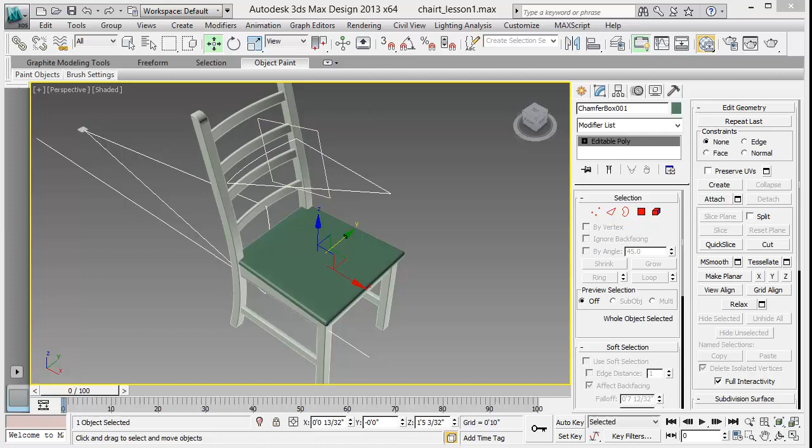Welcome to this tutorial. Here we will use the hinge from edge technique to create the curved back of this chair, and also I'm going to be using an arc and a horizontal line to do this curve back here. We will go from a curved leg to a straight leg, and we're going to also work on the back of the chair, which is another curved, using another arc. So you can see the chair has a couple of compound curves, and we'll get started.

So the first thing we should do is change your units to 1/32 of an inch in fractional inches. We will start by creating a tapered seat.

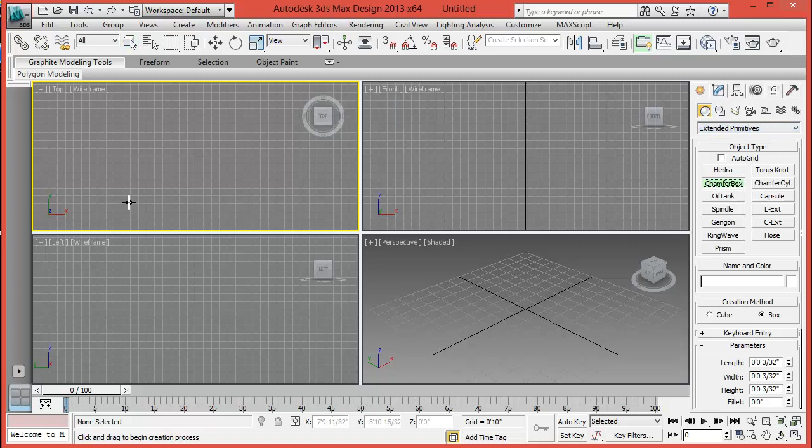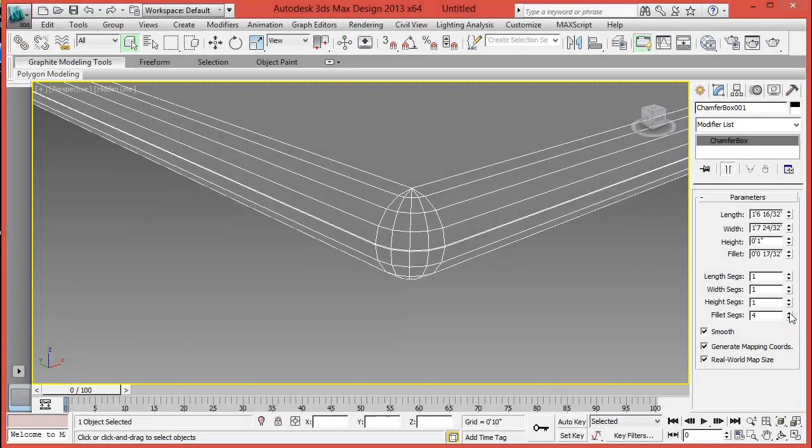From extended primitives, create a chamfered box. Make sure the dimensions are about 18.5 by 19.75 by 1 inch. We're going to change the fillet value to about 4 segments and 17/32 of an inch, and that looks pretty good.

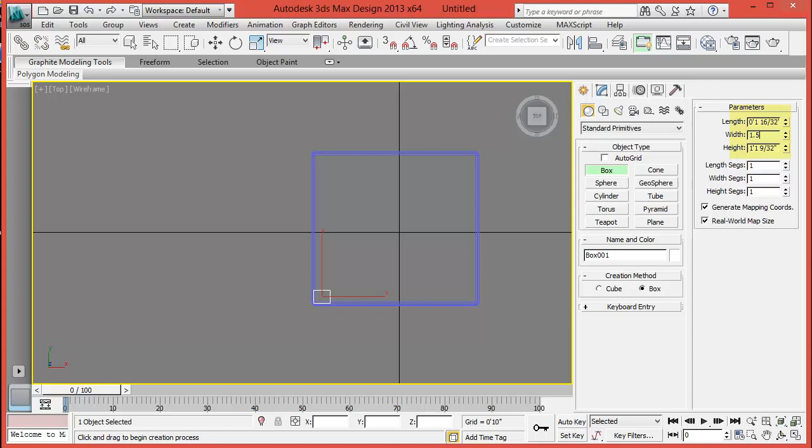Now create a box of 1.5 by 1.5 inches. The height doesn't matter right now, we'll work on that later. This is a guide to see where the legs are going to be cut. So we need to cut the seat around the leg.

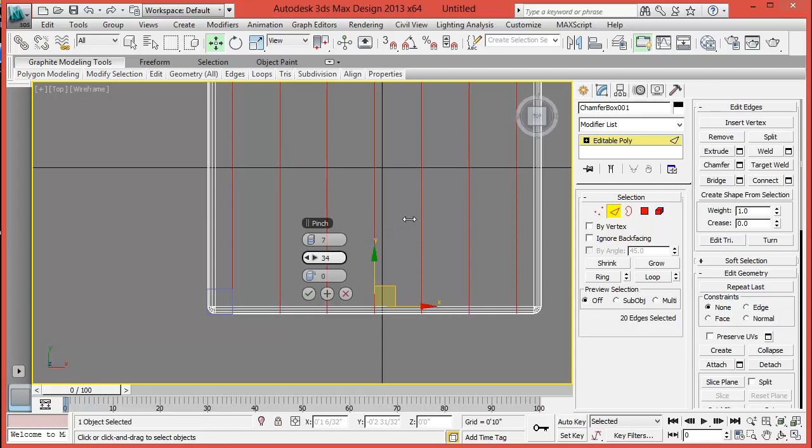So select the edges, connect a few segments, 7, 8 or so, and then slide the segments so that one of the lines is very close to the leg, like that.

Select the other side and do the same thing, and you should have a square here. Now let's move this box out of the way for a moment and select these corners and delete them.

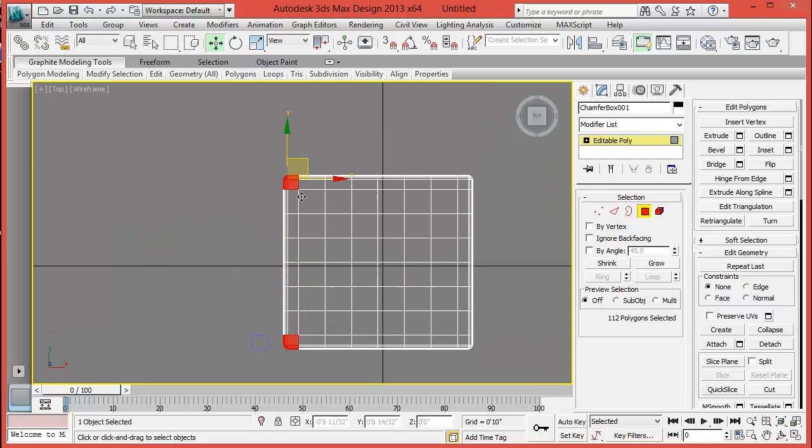Now we have created a hole in the back here, and we're going to close this by using bridge. Click on the edge, then select one of the edges and click on bridge, and go from one edge to the other across like this. Do the same thing here.

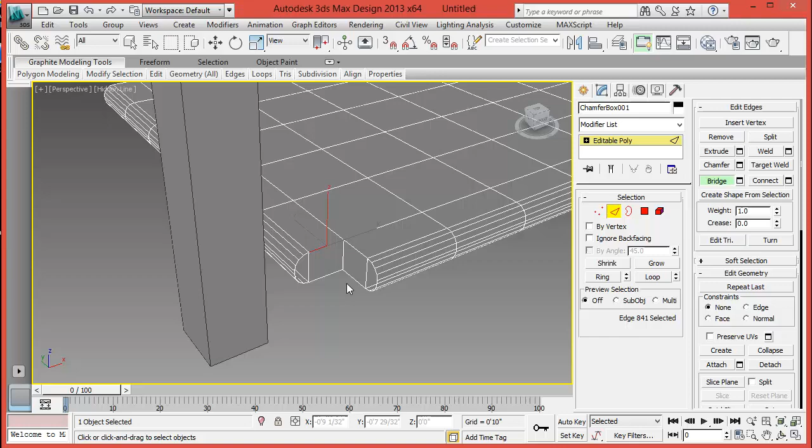We're going to do the other way, the other side, and bridge these two again. Now you still have holes to close, so we can use a modifier called cap holes while this is selected, of course. And that looks pretty good.

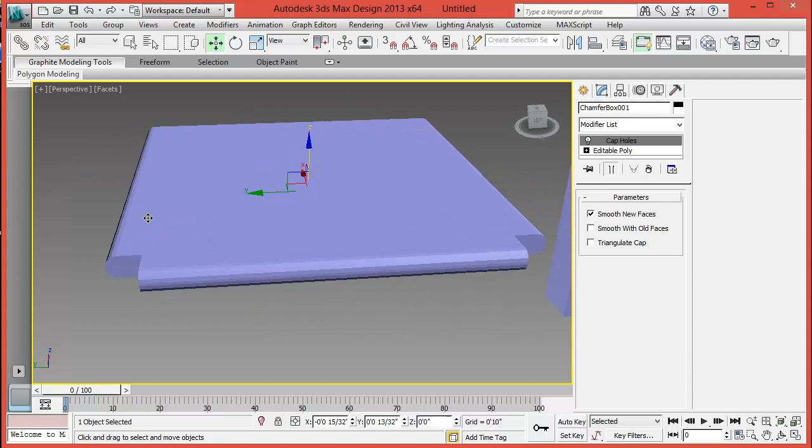Next thing we want to do is taper this seat so that it has the right shape. So we can collapse this first so it's one piece, and then we can change the shape by using the taper modifier.

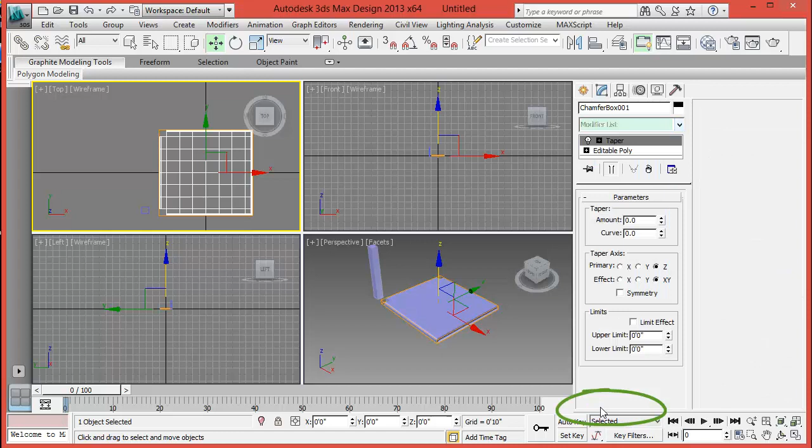Down here you click on taper, and then you can change the values here, maybe on the X on the primary, and then move it so that you can see the taper, and when you're happy you just stop there. Collapse this again so that it's one piece again.

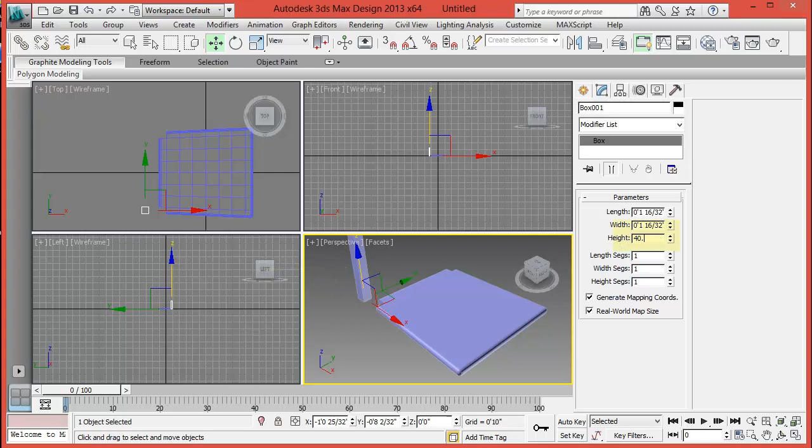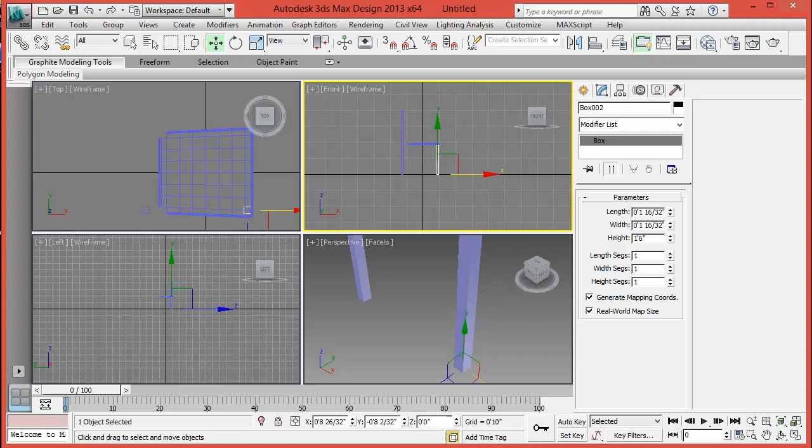Now we're going to raise the seat up to the height of 18 inches. So let me first make a copy of this leg, and we're going to make this about 18 inches high. This way we can use this as reference, and we can now place the seat exactly about 18 inches high.

And the next thing we're going to do is we're going to proceed to work with the back of the chair. So this is just for reference right now.

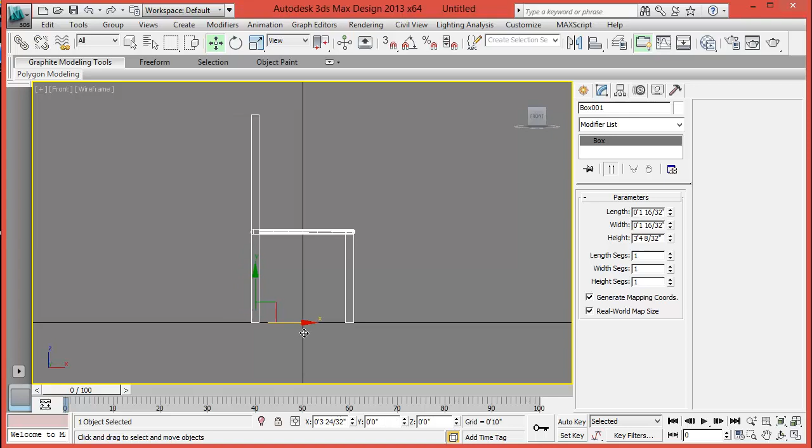Now before we go on, we are going to create a plane. Ignore this arc you see here for now, I'll explain that later.

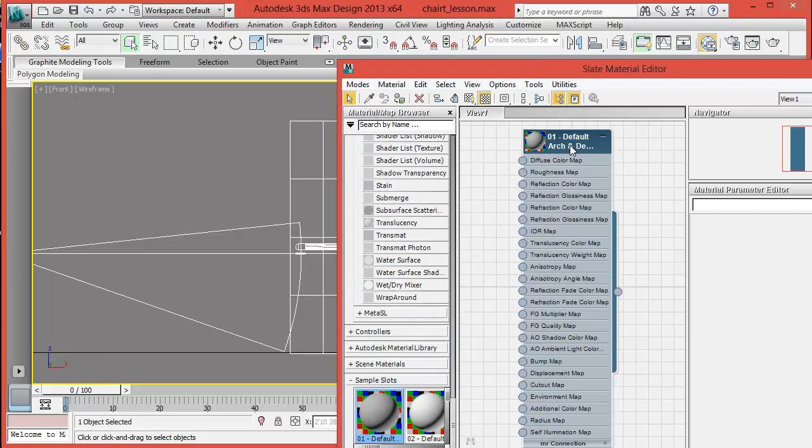On this plane I'm going to add a bitmap. It's a drawing I made from tracing from a photograph of a chair from IKEA. I have it here, and I apply this to the plane I made.

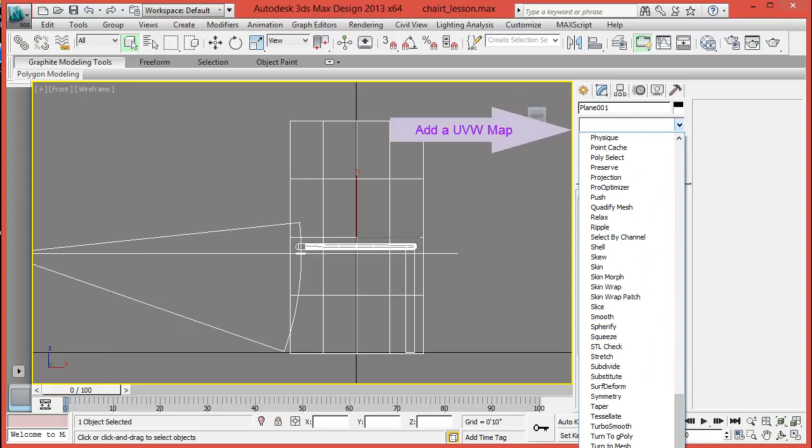Follow these instructions, this will help you see the image on our view here. Add a UVW map, make sure it's on planar, uncheck this here, and then change the views. As you change the views, we will be able to see the image here.

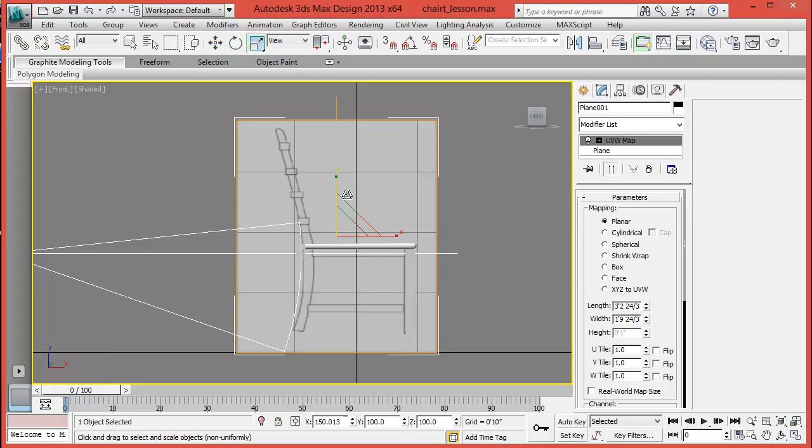Now you can size this plane so that it matches our seat, and the height of the chair. Once you get it done ready, we're going to proceed with drawing the arc we need.

I will delete this one for now and I'll explain. You need to draw a horizontal line like this for now and leave it here. It's just a line, we'll use this later and I'll explain why.

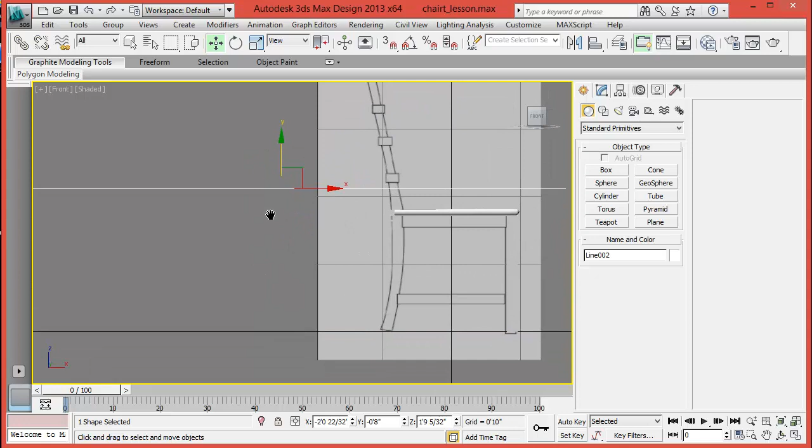Now let's proceed, starting with the leg with an arc. Click in the middle of the bottom of the leg and go up to about where you think the chair begins to go straight, and I think it's about here. Click again, pull the mouse and create your arc.

If you don't see the pie like you see here, click on this pie slice here. I'm going to change the color so we can see a little bit better. Now this horizontal line we're going to align with this, with the center of the arc. You can copy those values from one to the other one.

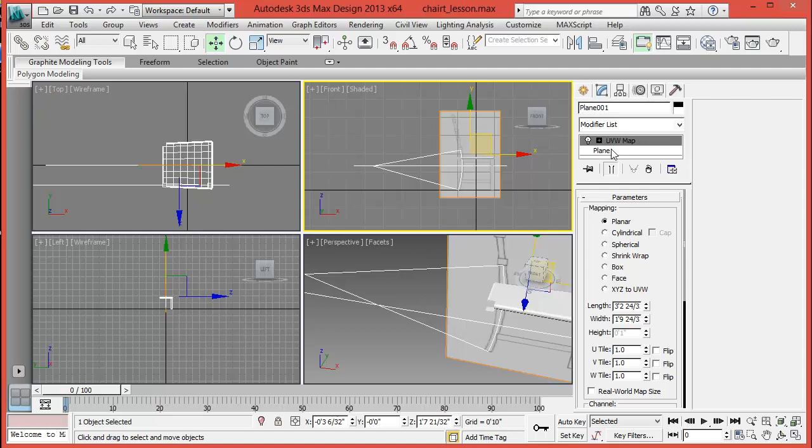We will also move a few things. Let's move the plane we made back here so it doesn't interfere with the drawing. And also we'll take the horizontal line and place it very close to the arc, so it's easier to see what we're doing here.

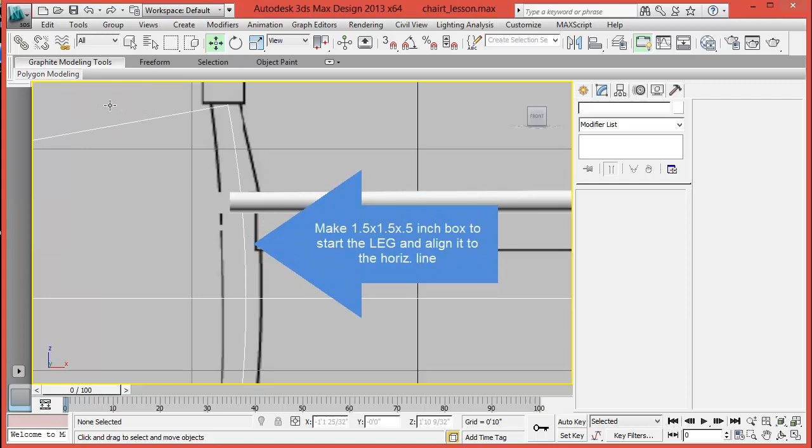Now we need to make a 1.5 by 1.5 by about half an inch or one inch high box. That's going to be the starting point, our leg, and we need to align this with the horizontal line and the arc. Where they intersect, that's where we need to place this.

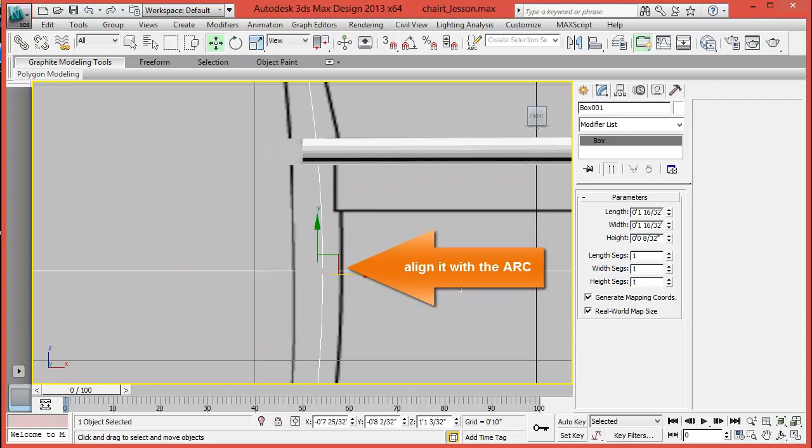You can't see it very well, so I'm going to change the color of this little box so you can see it. I'll make this a little taller so we can get started.

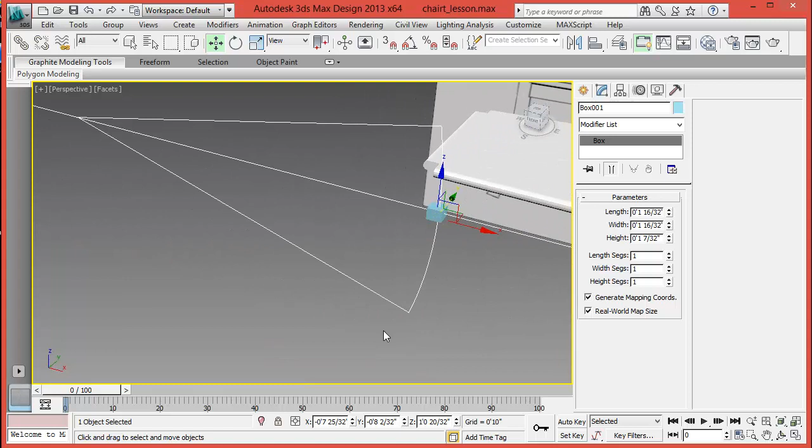Alright, the next thing we want to do is make it a little larger, center it, and on the perspective view, we're going to change this into an editable poly.

Select the top polygon and shift drag back. We're going to clone this as an element or to element, and align the edge of this polygon with the center of the arc.

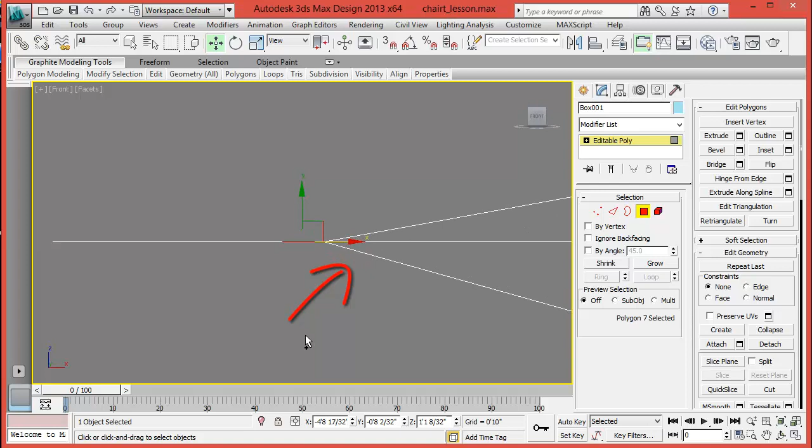So that's going to be our hinge. Now select this polygon here, click on hinge from edge, then click on pick hinge. We're going to pick the hinge, which is this edge here. Click on it, accept. But before you accept, we have to change something.

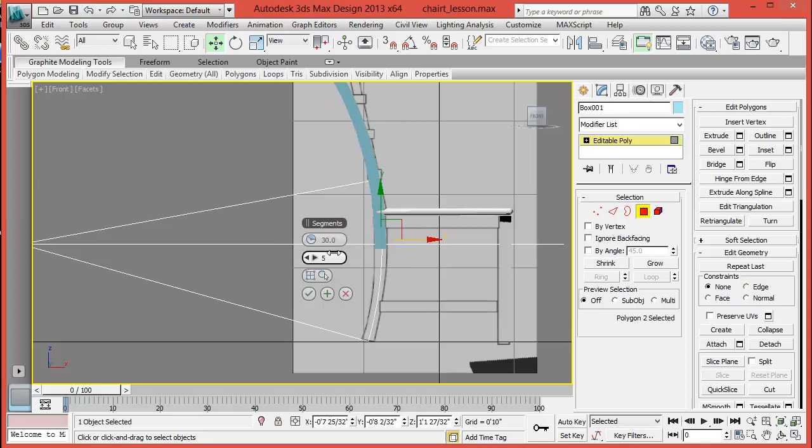The angle is 30. We go 5 segments, 6 segments, as many segments as you need. Let me change the view.

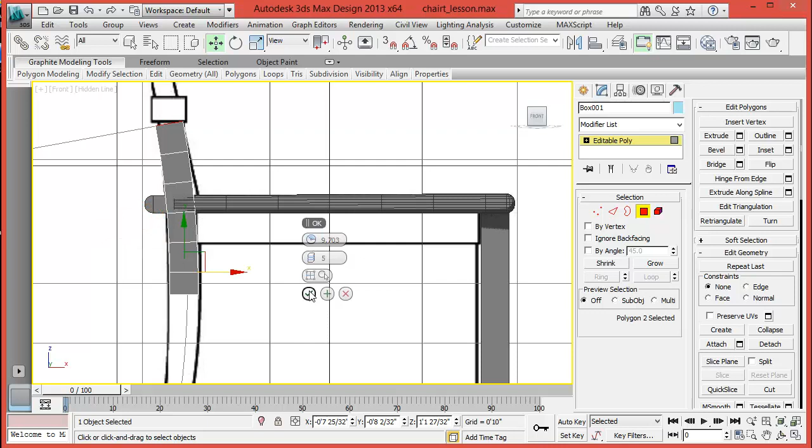Here's the angle. We need to go about that high, because that's where we're going to be starting on the top with our straight line. You add as many segments so that they align with the other pieces we're going to be working with. So say OK, and let's select the bottom polygon here.

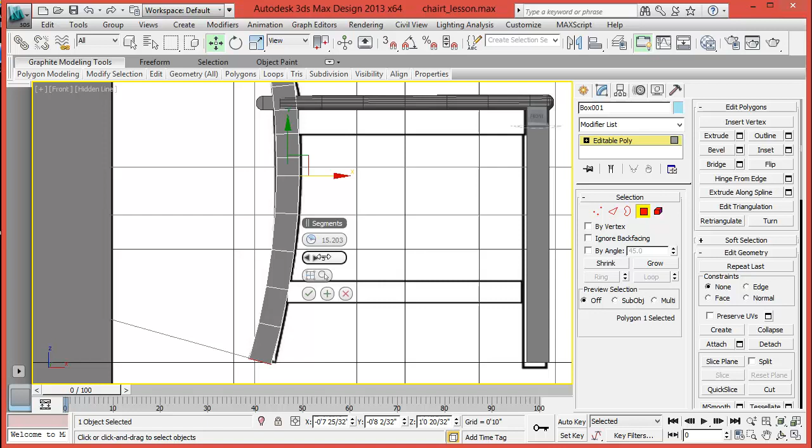Same thing, go hinge from edge. Since it's the same hinge, we don't need to pick it again. We just need to add the segments we need and the angle. Add as many segments as you need, so that these segments match the other elements here. We're going to be extruding these supports from here.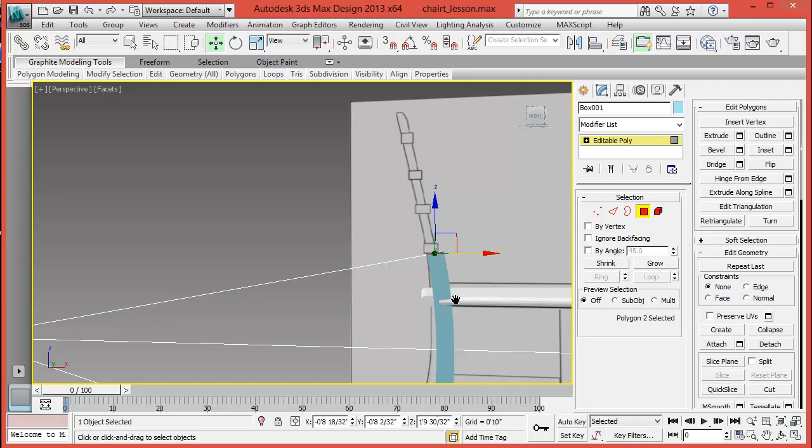Alright, next we select the polygon on top of this leg, and we don't need to hinge from it. We're going to simply extrude. Instead of extruding all the way to the top, let me change the view.

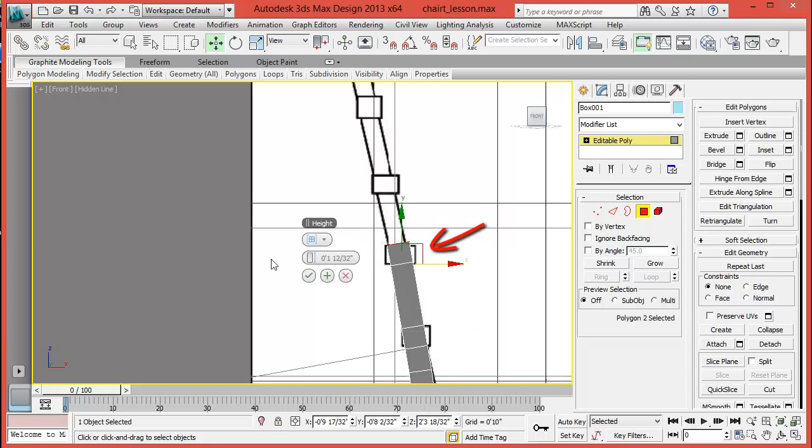We're going to extrude in segments. We're going to go slowly, and stop every time we need to create a segment. So this is the way to divide this where we need it.

So click on plus, add another segment, click on plus, add another segment, and once we get to the top here, we're going to extrude just a little bit more. We'll leave it here. Alright.

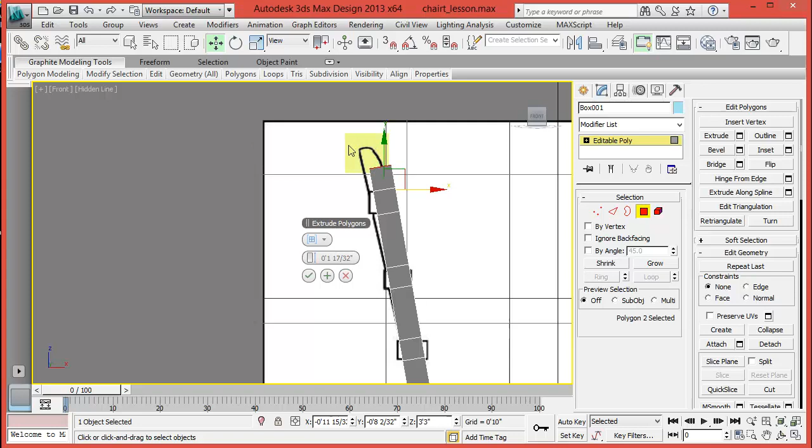So here we are with all the segments we need. We're going to work on the segments for the supports now.

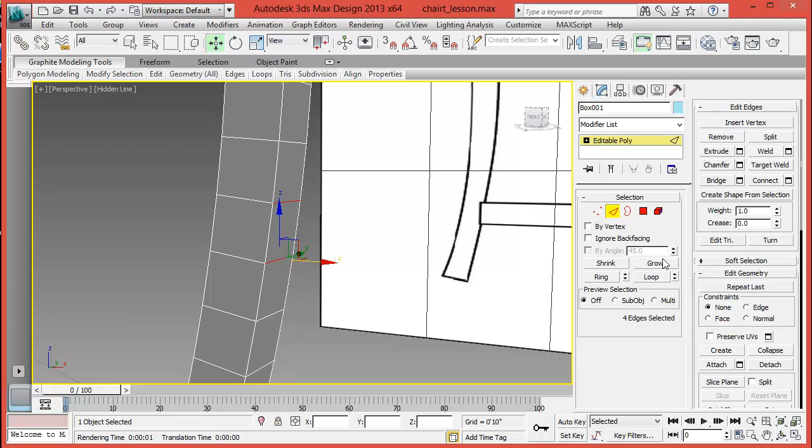Select these two, and then the one underneath here, where the support for the leg is. I'll just pick these two - I think I picked too high, but it's going to work. Connect, add two segments, spread them or pinch them so they're the size you need. Say OK, and then select the vertices of these polygons we just made.

And we're going to chamfer these also, maybe 1/16 of an inch.

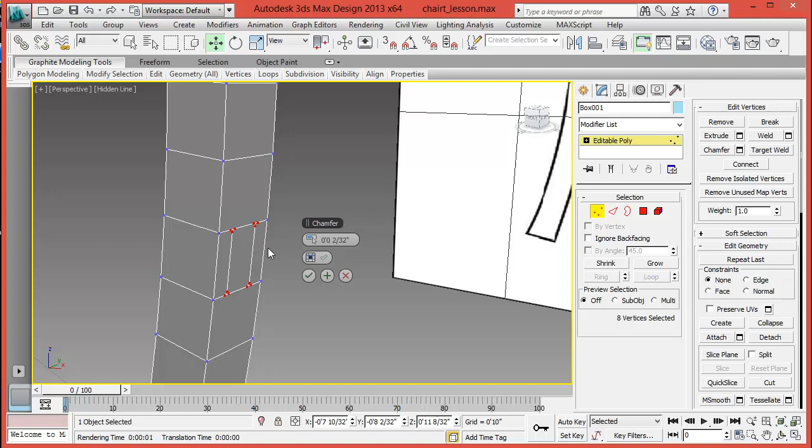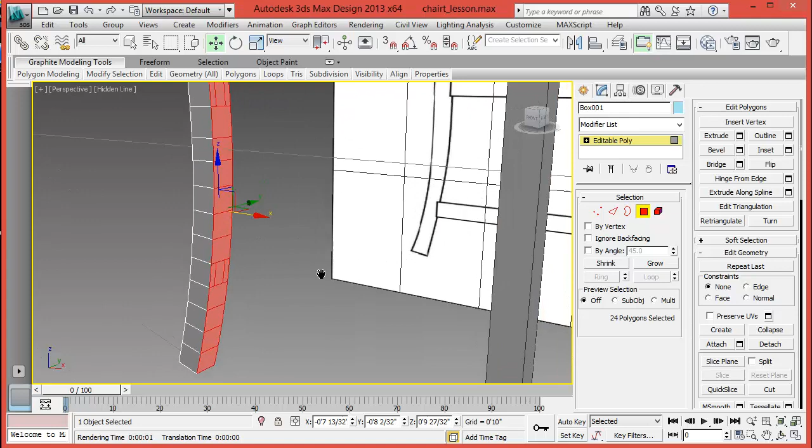Okay, now here comes the interesting thing about this. We're going to create the front leg from all these faces. We select all these polygons here, select all the polygons on this side, just below the seat.

Then shift and pull on X, so you copy and clone to element. And now from here we just go and click on make planar on X, and there you have it.

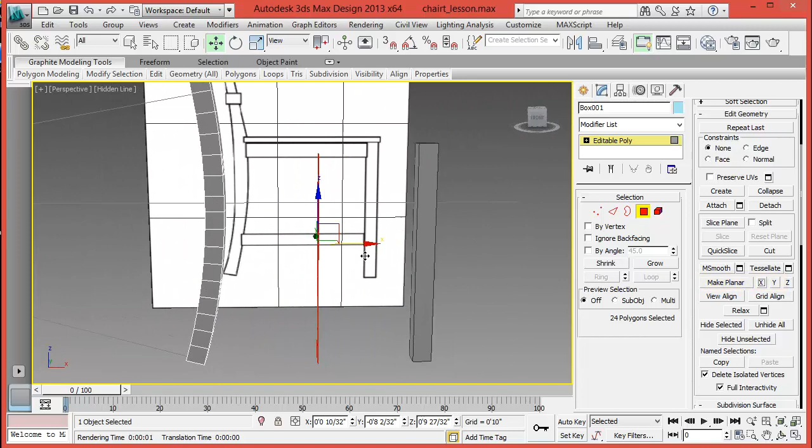Next thing we can do here is extrude this. Let me move it over here, and we're going to extrude about 1.5 inches.

What we're going to do is select all these elements, and we're going to detach this from the other leg. You can give it a name if you want. Detach this, say OK. So now it's a different element, as you can see here.

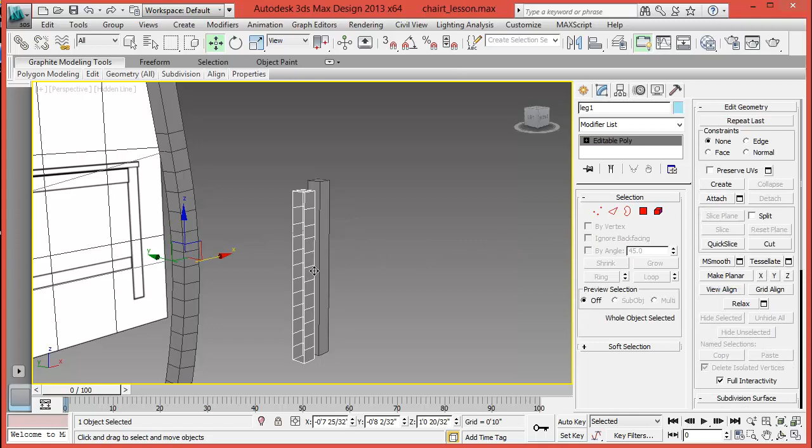I'm going to change the pivots or those center lines, the pivot references this way. Send it to the object so it's easier. So now we're going to move this a little bit over here.

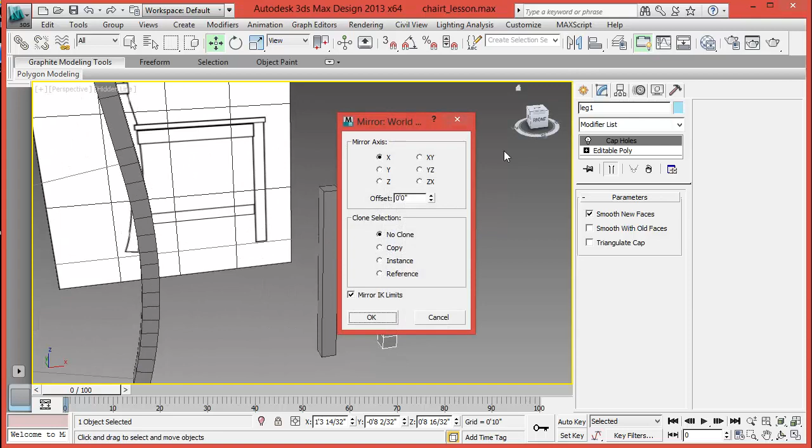And we will need to add this cap holes here, so we close the openings. Mirror it so it flips the other way.

Alright, now we can delete the old leg we made and use the new leg in place. Let me unhide the seat.

Alright, so now we have to remove this one - we don't need it anymore. And this one that has all the segments in place, we're going to put it back here. Delete this one.

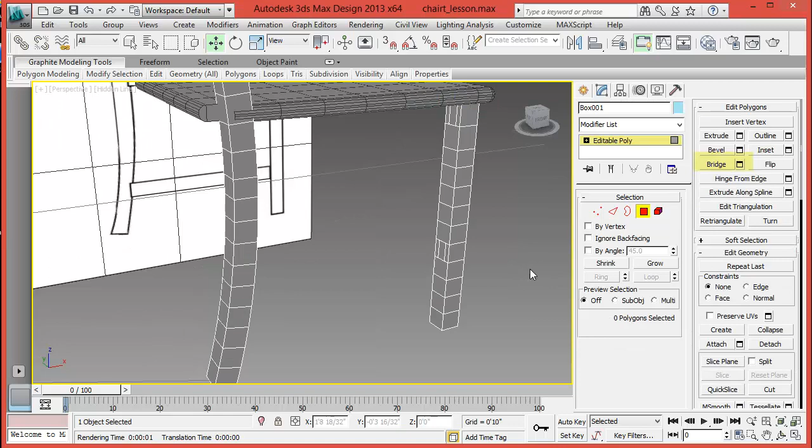Let's attach these two first. Now that they're one piece, bridge these here and this support here. That's great, it's horizontal, it works fine.

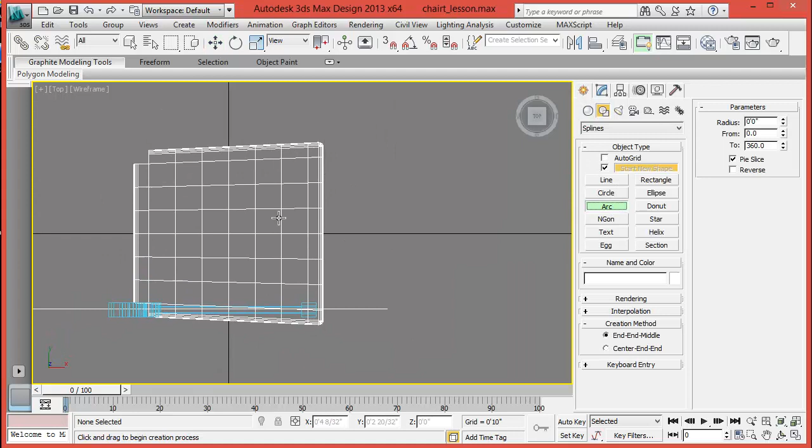And now let's see - we'll work on the top, on the curve in the back, and we'll create an arc again from here to the other side. Again, we're going to find out what that curvature is. I think it's about here somewhere.

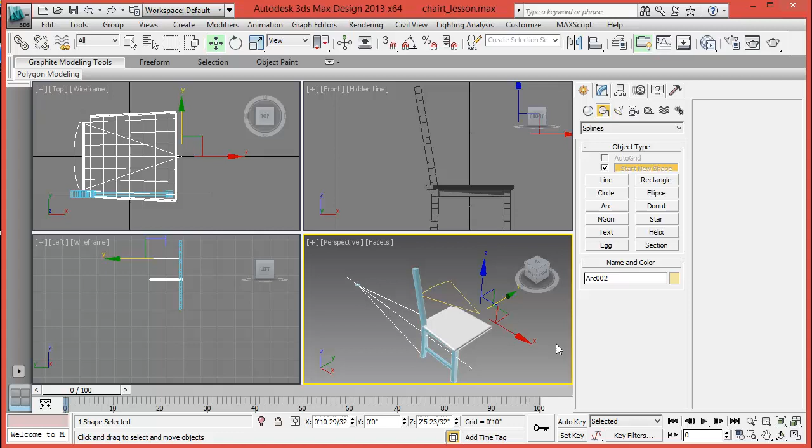And all we need now is, let's move this up here, change the color so we can see it. And there's our arc on the top.

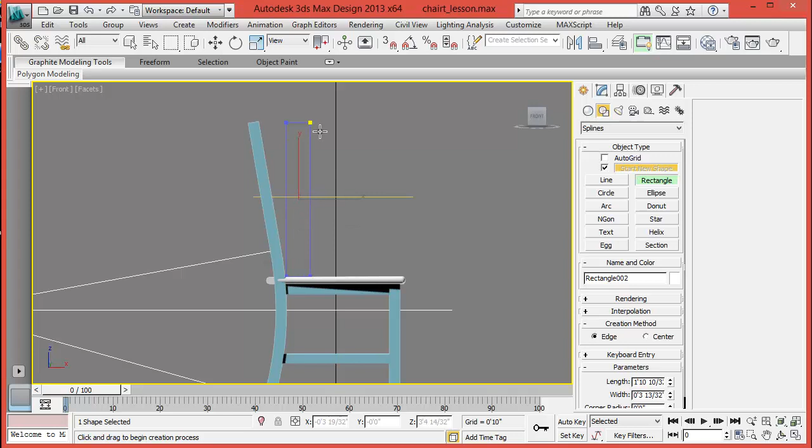But there's one thing - the arc is not perpendicular to the back, so we need to know how far the back is tilting. I'm going to draw a rectangle here for reference. Alright, make a rectangle here. With this rectangle I can see, and turn this back or tilt it, to find out the angle of the chair.

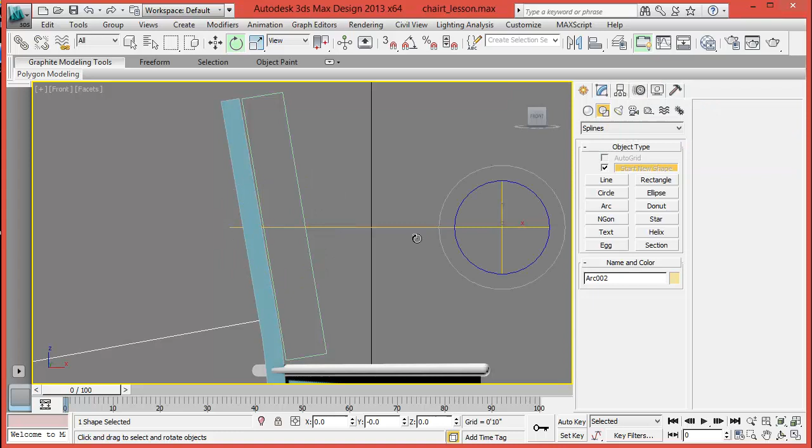You right click here and you can see that it's turned about 0.41. We'll copy and paste that over here. Now the arc is tilted the same way and it's perpendicular to the back. This is important because if you don't do it perpendicular, it doesn't work very well.

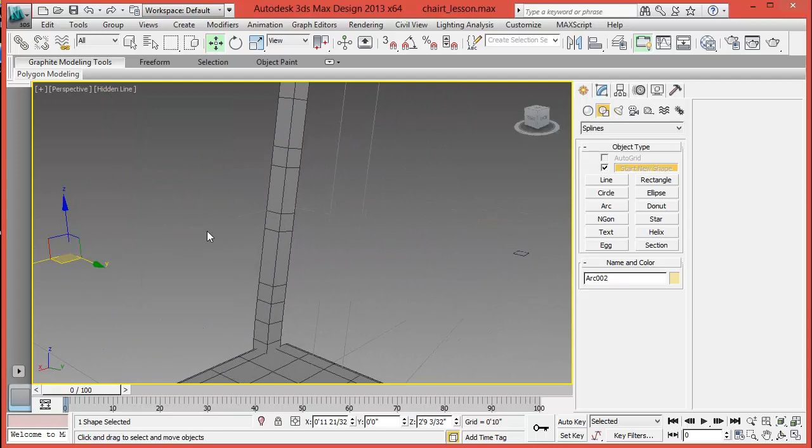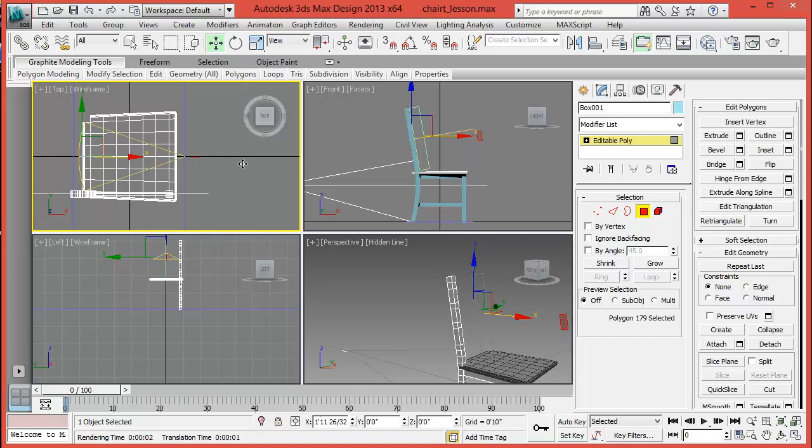Now we're going to borrow a face or a polygon from this leg again, maybe this one. Pull it back, clone to element, and then we're going to center this face with the center of the arc we created on top. If you want accuracy, you can click on snaps, and then you can move it so that it aligns with the edge of the center of the arc. Alright, that's going to be our hinge.

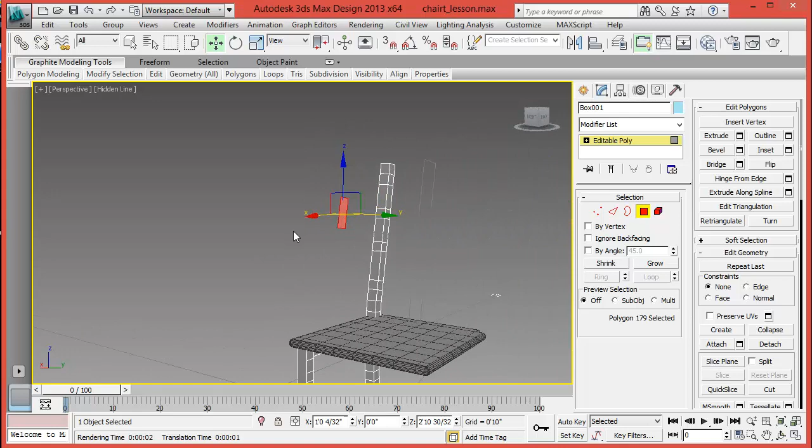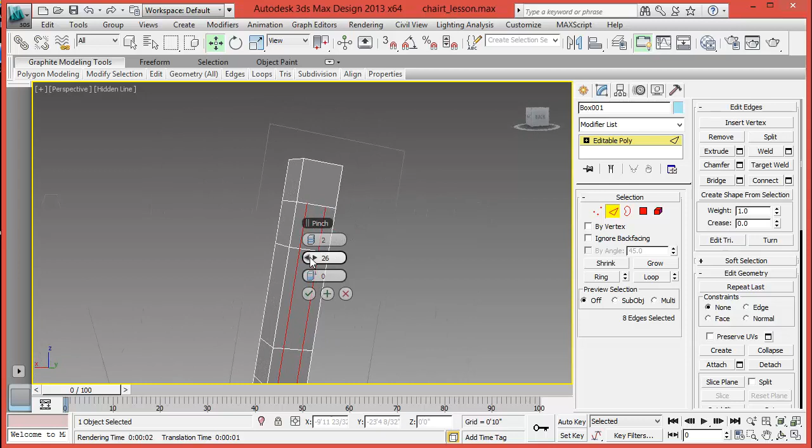So now we'll go inside the leg here, and I suppose before we do this we're going to create the polygons we need for the pieces in the back. Select these segments and click on connect. We'll make 2 segments and we're going to size it to where we need it. Also, we can select the vertices and we can chamfer them about 3/32 of an inch and say OK.

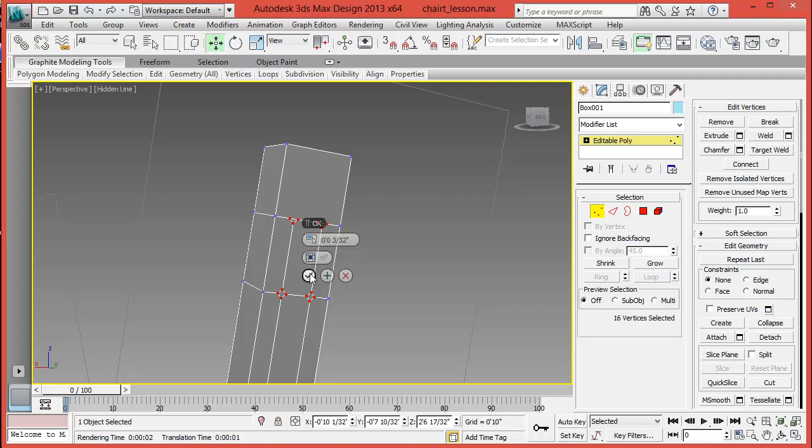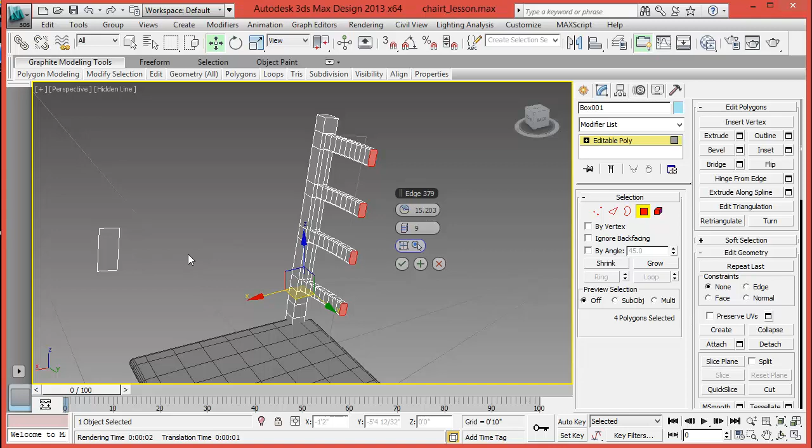We select those polygons, those profiles, I call them profiles, and working on hinge from edge, select pick hinge and select the edge of this hinge here, and there you have it. So you can just add more segments if you want it smoother.

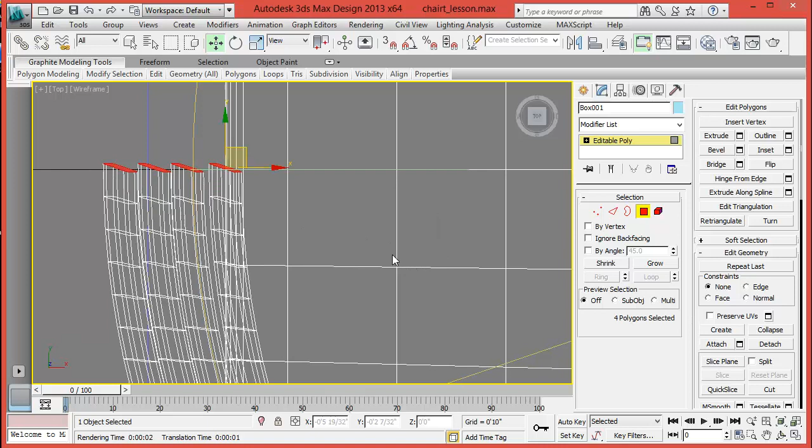And on the top view here we can see if we made it through the center of the arc. So we need to add a few more segments or extend the angle about right there. And you can see each one of these ends are crooked or in an angle. We're going to fix that using this tool here and pulling down on Y several times until it's all flat.

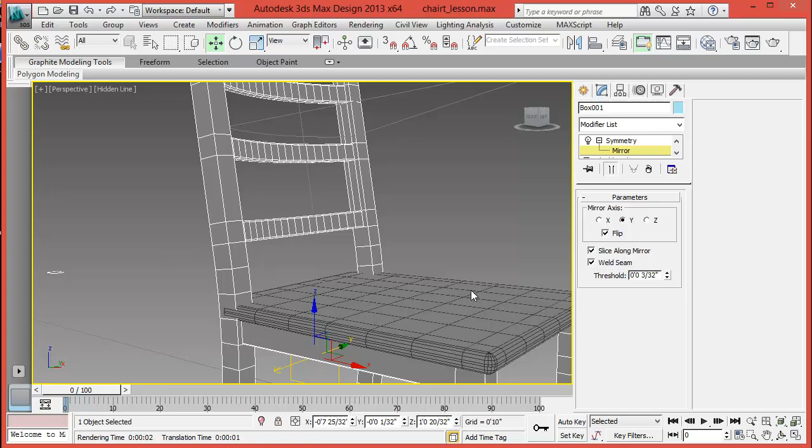Now we can apply a symmetry modifier to see our progress. On symmetry you have to learn how to select certain things here. Click on mirror so you can drag these little handles and move it. On the Y-axis here you can flip this if it's the other way around, get a closer view and put it together. So it's looking very good. We'll correct this later. For now, let's see.

I'll make a couple of corrections here.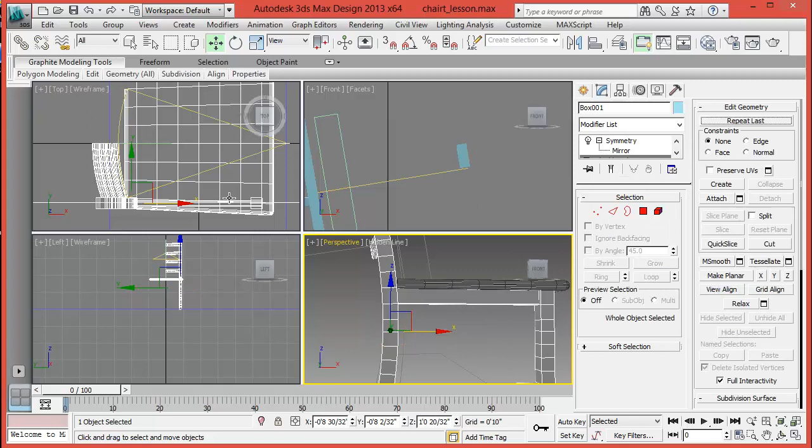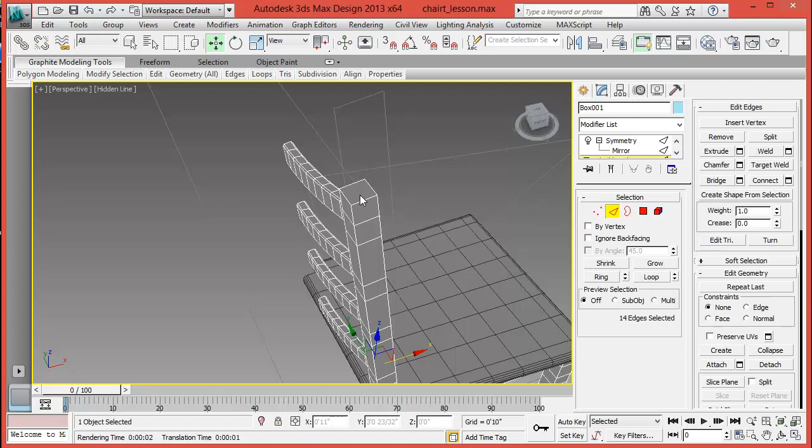Oh yes, we can work on this area now. Remember the top we left a bit unfinished. You can just chamfer the front edge of this leg here, but we're going to use another method since we're working on hinge from edge. Just create this segment here,

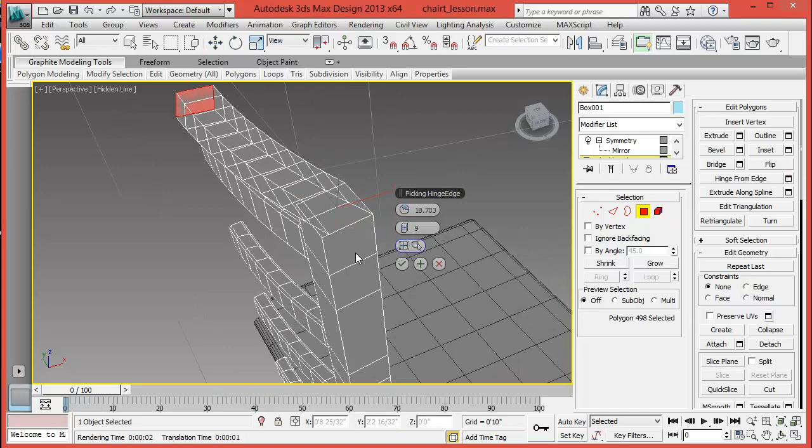then select the polygon, and we're going to click on hinge. We're going to hinge on its own side. This is pick hinge here first and then select the hinge. I think I clicked the wrong one. As you can see, this is not what I wanted. I want the hinge that is actually, let me move this down so we can see it. I'm going to pick the hinge again. Try to get it this time. Pick hinge and select this one.

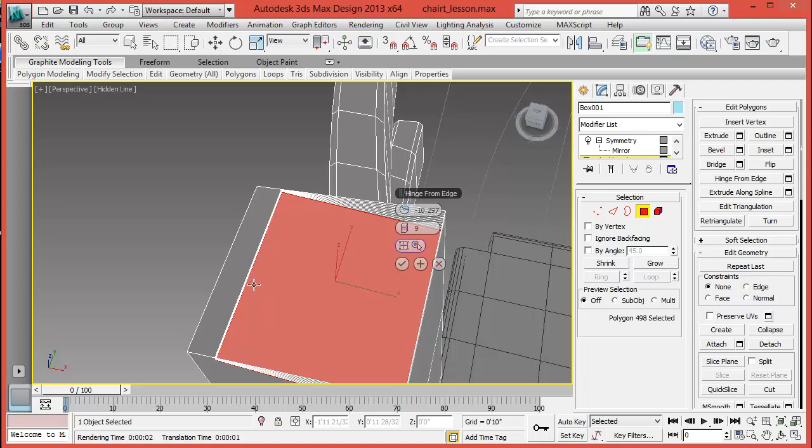I think that did it, and we can test this. That's perfect. So add as many segments as you need. This should be 90 degrees, so it's perpendicular to the top.

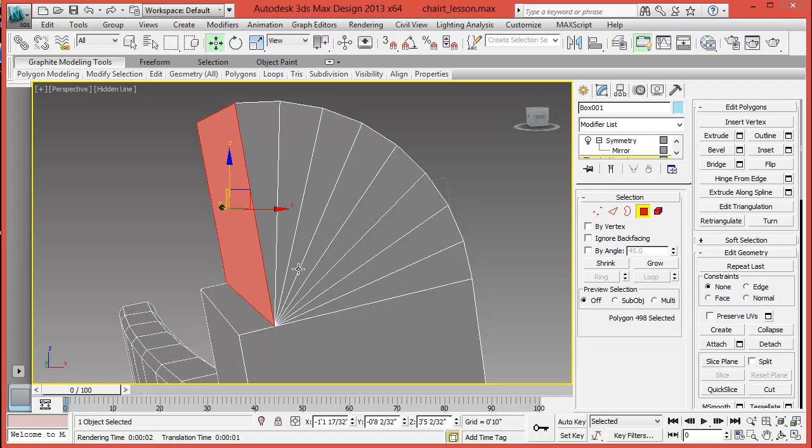And now we're going to complete the back of this. The two segments, not those two, these two. Connect one segment, accept, and let's extrude this face here just about the same distance of the piece that's at the bottom here, this one.

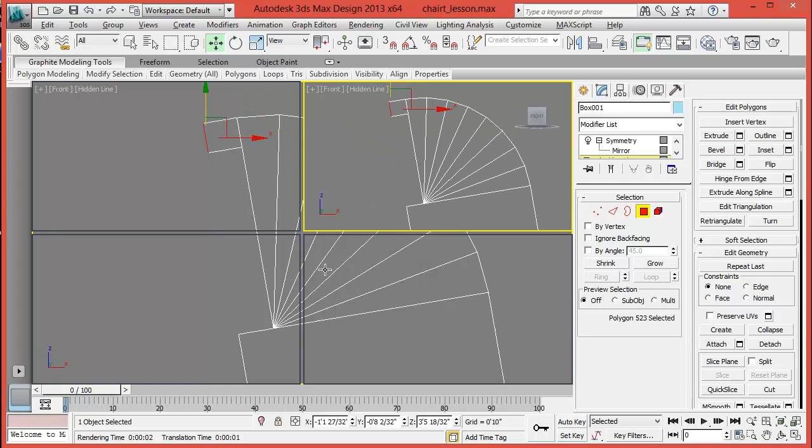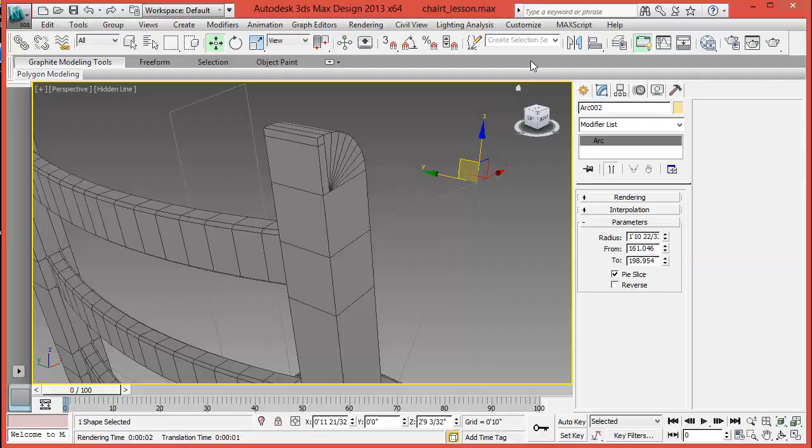And then when we're done, accept this, and we're going to bridge from the bottom of this to the top. Oh well, I lost that because I should have left that face selected, but that's fine. There we go. So that completes this, and there's a reason why I used this method. You'll see later how easy it is to use chamfer on the edges.

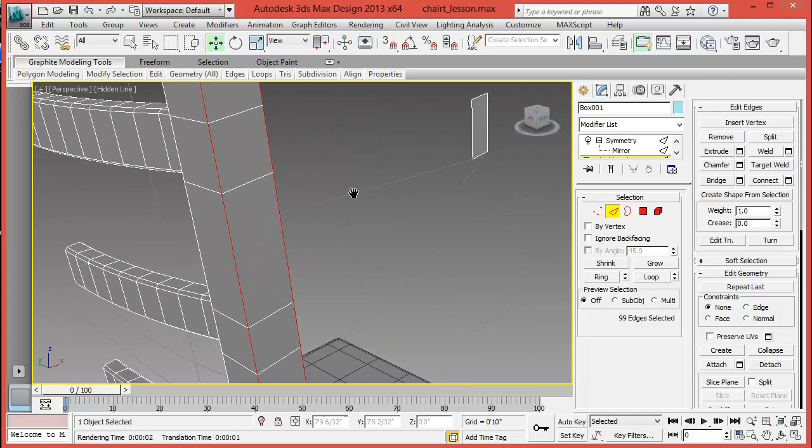Another thing we need to do is, well, let's look over here. You select this, click on this side maybe, select the edges, click here, click on loop, select these, and loop again, and you got it. You see how easy it is, and it selects everything you need.

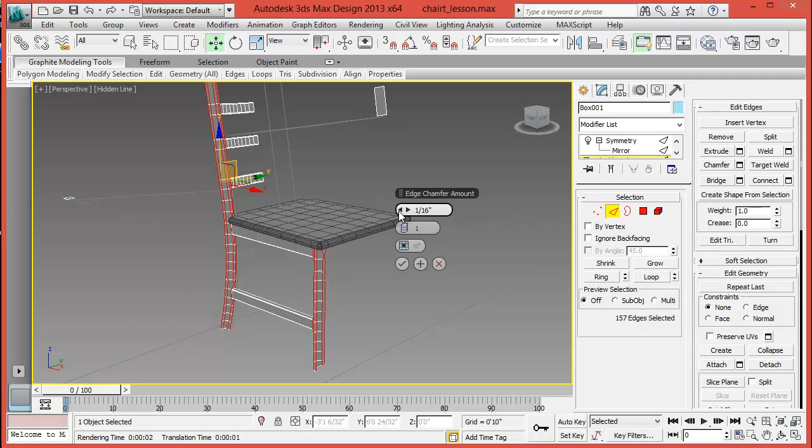So now we can chamfer these edges, maybe 1/16 of an inch. That will do for now. We're good.

Oh yeah, the leg here. Select these vertices down here, and using this tool again, pull it down several times until it's flat, and we're done.

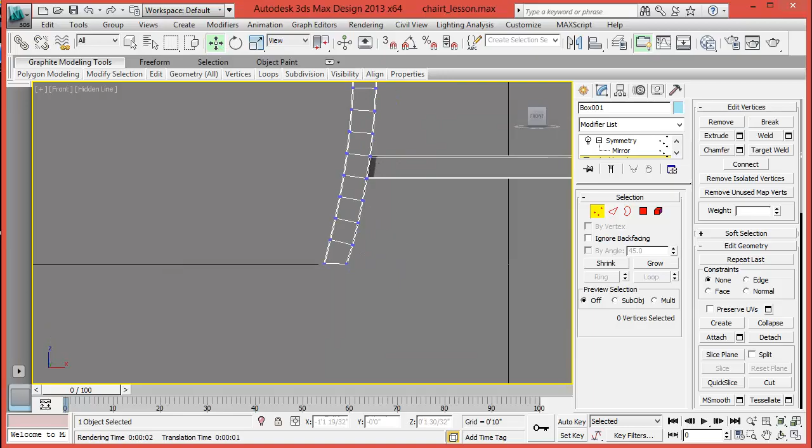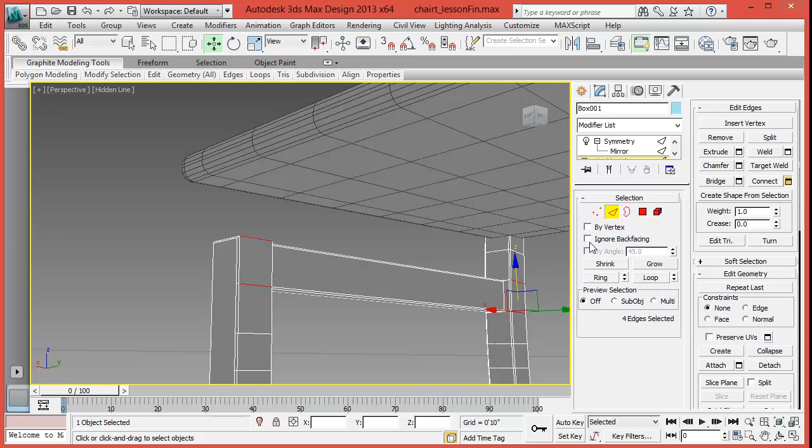Now we can complete the chair by doing the front and back supports. Let me hide the seat for a second so when you see back here, it'll be easier to work. Select these two here and these two. Connect two segments again. Create your profile.

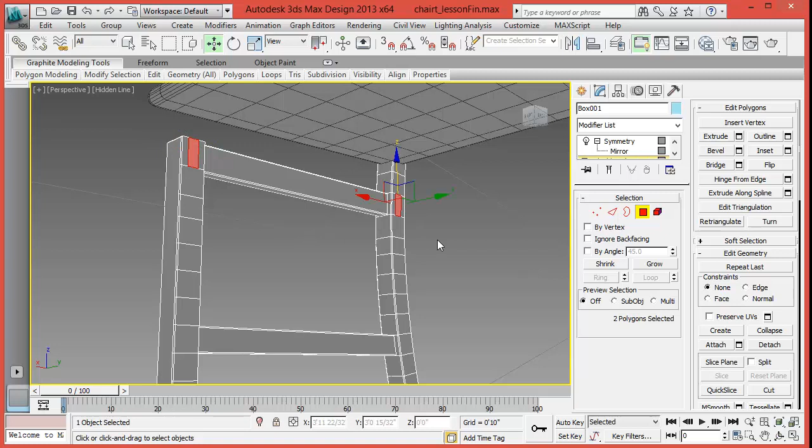Once the profile is done, you can select the vertices. Select the vertices and chamfer to create your profile again.

Now we can select the polygons and extrude. Let's change our view so we can extrude from the right view, and it's easier to see how far we went.

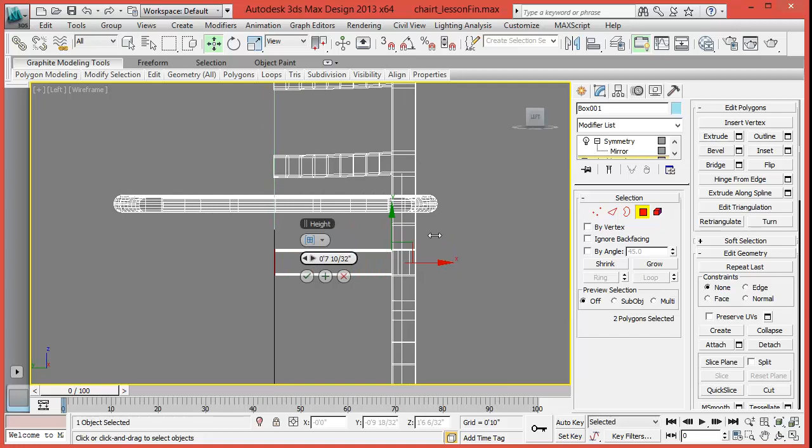And now we can click back on symmetry, and everything seems to be working fine. Move and make a couple of corrections here. After this, you can color it, add materials, and that's it.